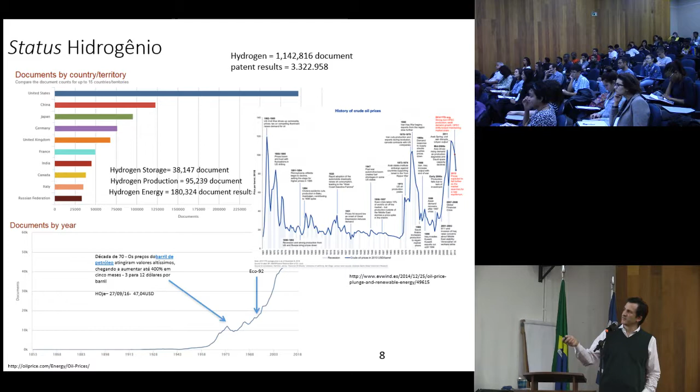So we start today with hydrogen production and storage for fuel cells. First, fuel processing may define the conversion of the waste primary fuel into different kinds of fuel supplied to the fuel cell system, specifically the fuel gas required by that stack. Important: each type of fuel cell stack has some particular fuel requirement.

For example, for phosphoric acid fuel cell, the hydrogen must be rich and contain less than 0.5% of carbon monoxide. Carbon monoxide is a poison for phosphoric acid fuel cell, as is the case for PEM fuel cell as well - it needs to be essentially carbon monoxide free. But molten carbonate fuel cell and solid oxide fuel cell are both capable of utilizing carbon monoxide through the gas shift reaction.

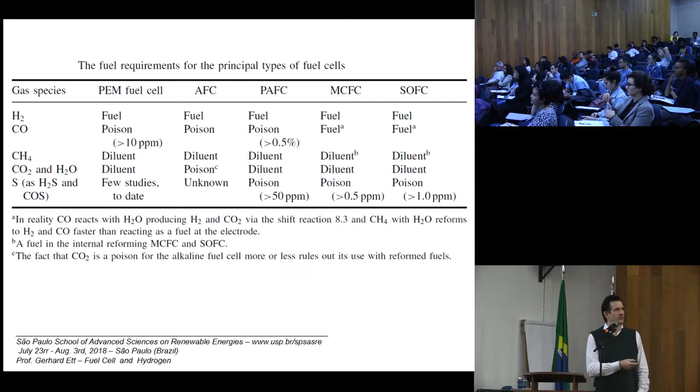Here we can see that about 500 billion cubic meters per year of hydrogen is produced in the world today. 4% comes from electrolysis, 18% from coal, 48% from natural gas, and only 30% from oil. This gives us an idea of hydrogen production in the world, but most hydrogen is produced for the petrochemical industry.

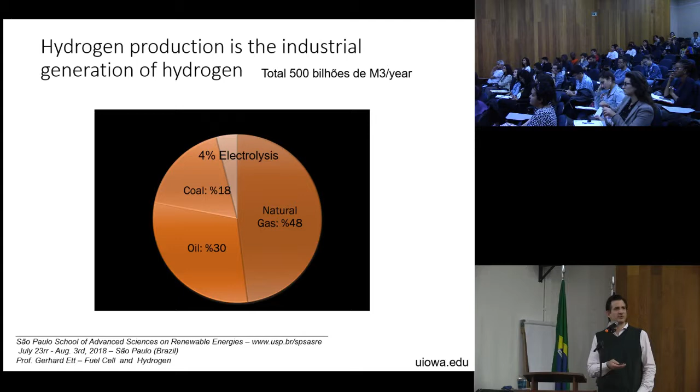So here you can see some technologies - look here, coal gasification with CO2 sequestration, using coal with very low CO2 emission. This is the reason they put this technology in the future: coal gasification, normal gasification here, coal gasification with CO2 sequestration here, electrolysis - this kind of technology is the future.

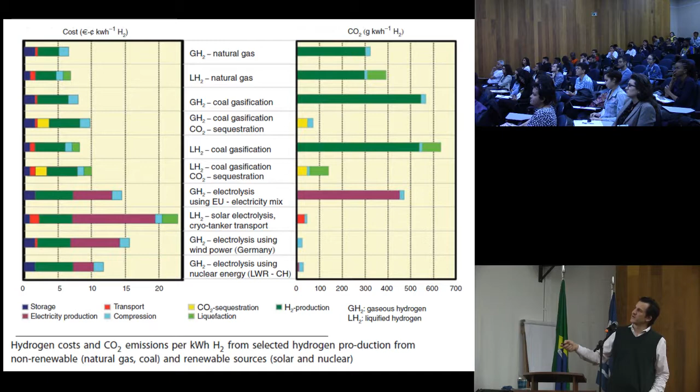Because you said, like for the coal, for the natural gas, and for the oil, you have no idea what kind of technology they use - like using oil, I will show you today. I have a picture from oil; the name is RASF. It's a subproduct from petrol, from oil, and they have an entrained flow gasifier.

In Brazil, we have 4 plants in Araucária, in Paraná, and they do the gasification of the RASF to produce urea and ammonia.

Good, I have the picture here, but not in this computer. So, hydrogen... well, no, one more question.

My name is Csaba from Hungary. What technology is used for CO2 sequestration? That's not very clear, it's like clean coal. It doesn't exist, clean hydrogen with coal. What technology do you use to capture the CO2?

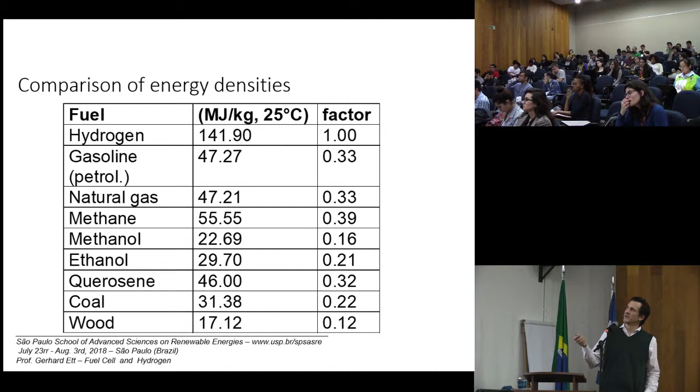Here we need a normal cubic meter, not pressurized. But we can still compare the data.

For hydrogen production, we can find different methods: gasification for forests, or biological processes that decompose forest material and produce methane, then hydrogen. Waste from sugarcane production for biogas, direct from sugarcane production, or from water electrolysis using hydro or solar-eolic power.

We have two big projects running today. One is from CESP to produce hydrogen, and another from a transmission energy project, also from oil, to produce hydrogen.

We have different kinds of fuel cell technology, but one I didn't mention is the reverse fuel cell. What's a reverse fuel cell? It's like electrolysis - a PEM electrolysis and a PEM fuel cell have the same materials, just changing a little in the electrode. One is titanium, another carbon black or graphite.

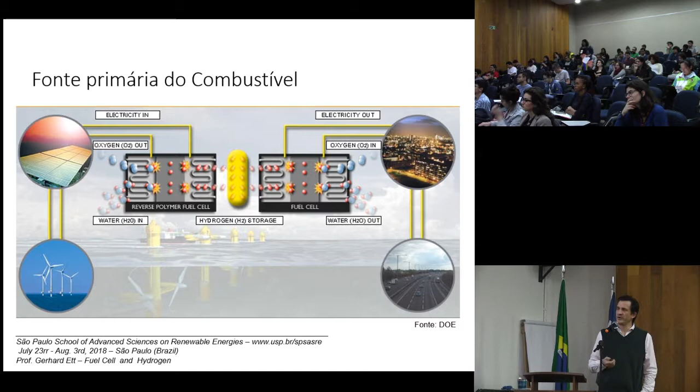But we have some primary fuels: natural gas that we can reform, methanol that can be reformed or used in direct methanol fuel cells, biogas from decomposition of garbage, gas reformation, and ammonia reformation.

Yesterday on the internet I tried to change my presentation for today. I found a company selling ammonia fuel cells online. A long time ago, 10 years back, I saw a company like this at a fuel cell congress. But now it's a very nice product, well designed.

Ethanol is strategic for Brazil, but not only for Brazil. For storage, we can use direct hydrogen tanks at 350 bars, but the European trend is toward 700 bars. Also metal hydride, carbon nanotube, liquid hydrogen - I will discuss more about this.

For hydrogen production, we have water electrolysis, and different kinds of it: conventional electrolysis, old electrolysis that used mercury, and advanced electrolysis with new electrodes and special membranes, like a PEM membrane, Nafion.

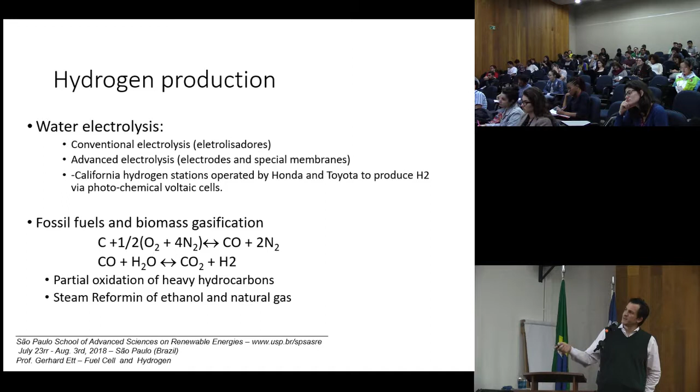We also have fossil fuel and biomass gasification - we saw this reaction earlier. Then we have partial oxidation of heavy hydrocarbons, which is what you asked about. And steam reforming of ethanol and natural gas.

Then there's thermal decomposition of water at high temperature, where water decomposes. We also have chemical water decomposition, using iron chloride with hydrogen, and byproducts from industrial waste - the very famous chloroalkali process. All the materials from the PEM fuel cell, the membrane, start here - used first in the chloroalkali process, then the technology changed to be used in the PEM fuel cell.

Is it possible to produce hydrogen with wastewater? Can you go back in the slides?

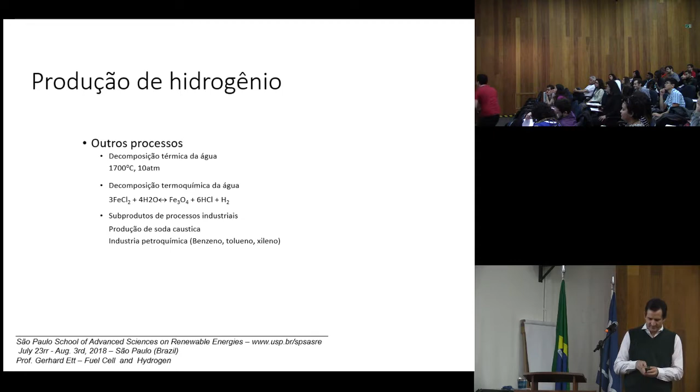Yeah, this thermal decomposition of water process. Is it possible to produce hydrogen using wastewater? Yeah, but you need very high temperature, unless you use a catalyst, which makes it much more efficient. It's possible, yeah. What happened on the nuclear reactor?

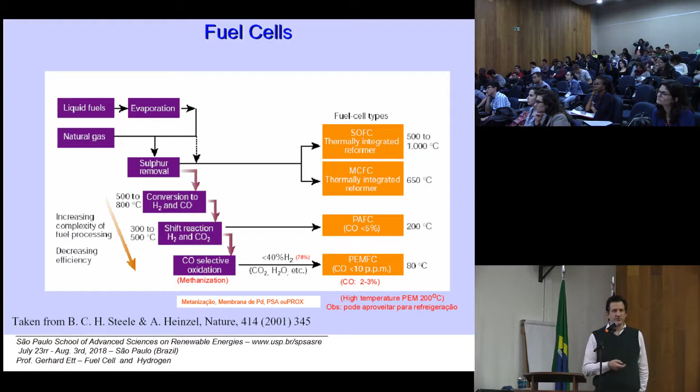But the normal PEM fuel cell is very intolerant, look here, less than 10 ppm of carbon monoxide. So they need a CO selective oxidation step, putting a little oxygen inside the hydrogen to oxidize the carbon monoxide to carbon dioxide, which causes no problem. When we use high temperature HT-PEM, it's possible to increase the tolerance of carbon monoxide up to 3%. This is fantastic.

So we start with the reforming process, using the gas we have here in the cylinder. This comes from steam reforming of ethanol or natural gas reforming, but this is an endothermic process.

This is a high yield of hydrogen process, steam methane reforming. They can produce hydrogen and carbon monoxide at a ratio of 3:1 or 5:1. For the Fischer-Tropsch process to produce gasoline, they normally use 2:1, but there are some variations of the process.

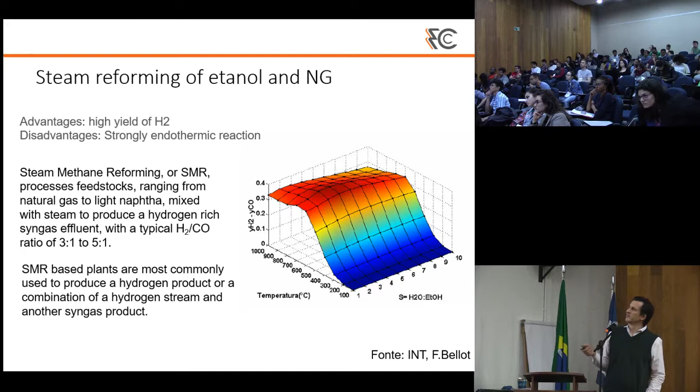If you use a different kind of catalyst, you can change the whole reaction. The catalyst is very important to direct which product you would like to have. Here we have INT from Brazil, which studies very strong catalysts. Also at the University of São Paulo, in the Polytechnic School, we have one of the best teams working on catalysts.

Steam methane reforming: here we can see the reactions. Methane reacts with water at high temperature to produce carbon monoxide and hydrogen. The carbon monoxide can then react with water vapor to produce CO2 plus hydrogen. All these reactions use nickel as catalyst.

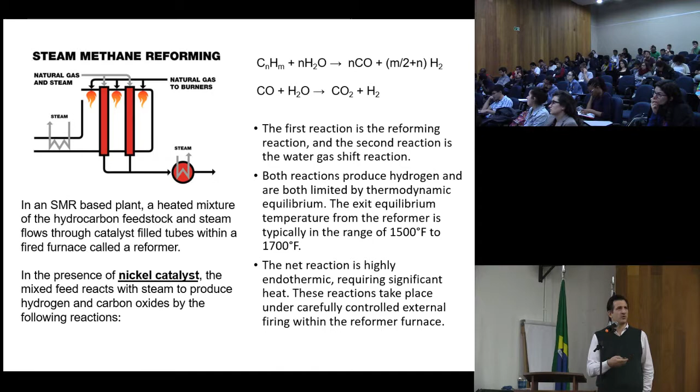They run this in a high temperature process, with an indirect flame outside the reformer to heat everything. This operates without oxygen, but it's possible to operate with oxygen too, though that's another type of process. In steam reforming, depending on the temperature of the process, you can change the product you will get.

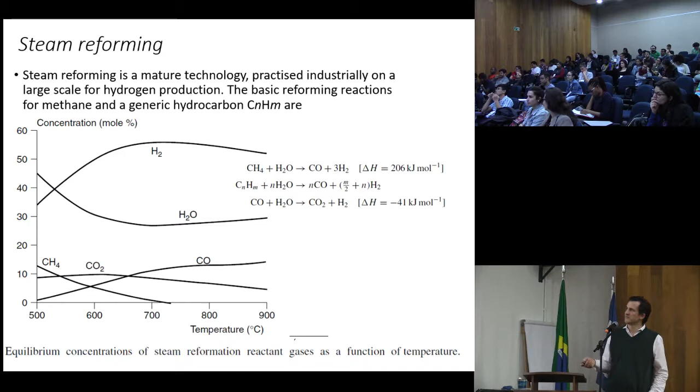Look here, the concentration of hydrogen increases when you increase the temperature. And here, let me go back.

One big problem with all the catalysts that run at high temperature, the same for the molten carbonate fuel cell and SOFC fuel cell, is the risk that carbon can form inside the fuel cell system, inside the reformer catalyst. This can occur in several areas of the system where hot fuel gas is present. But it's possible to control this if you put a little water inside. I will show some pictures about it.

A simple way to reduce the risk of carbon formation is to add steam to the fuel stream. The principal effect of this is to promote the shift reaction, which reduces the partial pressure of the carbon monoxide. This steam also leads to the carbon gasification reaction, which is really very fast.

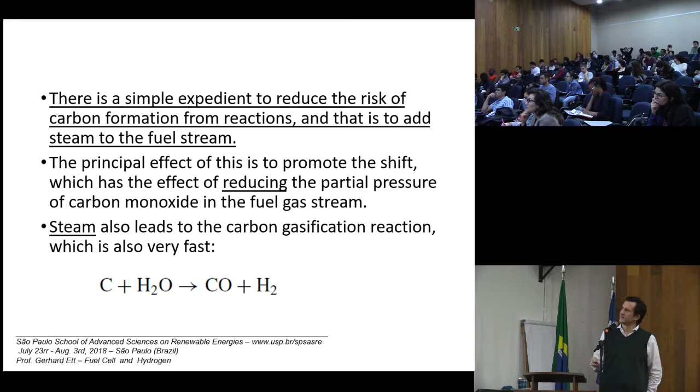Here's a project from Siemens, a solid oxide fuel cell. We can see here the desulfurization, the catalytic adiabatic pre-reformer, and the high temperature fuel cell. Then we have the autothermal reformer.

We note here that we put a little oxygen inside the reformer, and here it's minus 50. It's like a steam reformer, but when we put oxygen inside, we can heat the reformer more easily. And the ratio of the syngas proportion also changes: it was 3:1, now it's 2:1.

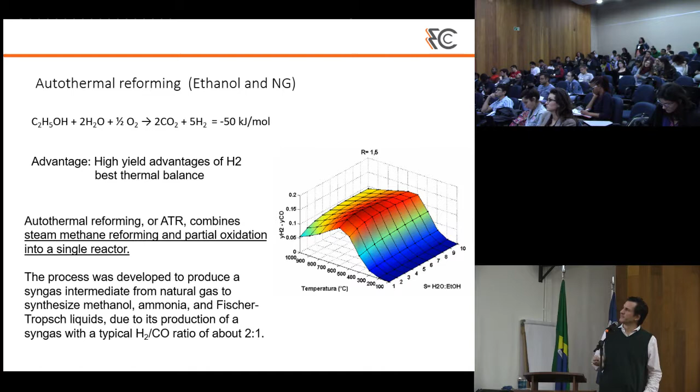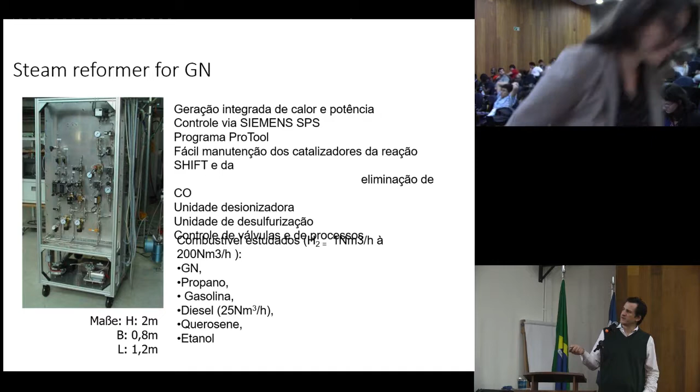Here we can see the design of a reformer. Here you have the burner. Here we have the vaporization of the fuel. Here you have the reformer zone. Then heat exchange. Then here you have the shift reaction. It's a lower temperature. Again, heat exchanger.

And here the last part, to remove all other contaminants, CO removal. And here we can also use pressure swing adsorption, PROX, preferential oxidation, and also palladium membrane. It's very useful in some new small reformers. So here is a diagram from our German reformer.

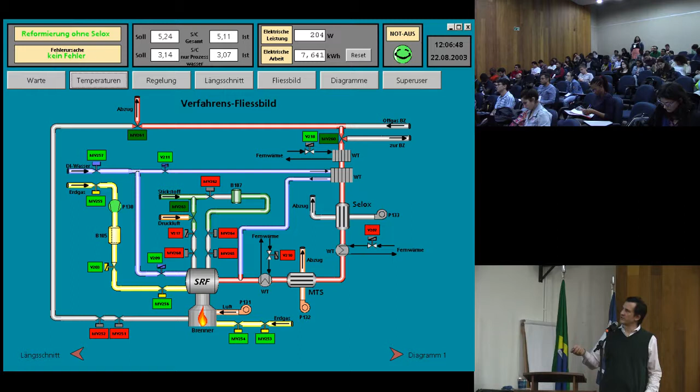Then here you can see the reformer and all the process that they have to control the process. I will show more details of the project. Here you can see this part here, the temperature of the reformer. Here the temperature inside the reformer, outside the reformer. Here the power of the stack.

They change the power, the electronic load. And here we saw the answer that the temperature from the cell increases, then decreases, then increases and decreases. And the temperature of the reformer stays stable. This is very important, that this reformer works with the fuel cell. Here then we start, interrupt the fuel cell, and the reformer stays stable. Nice result here.

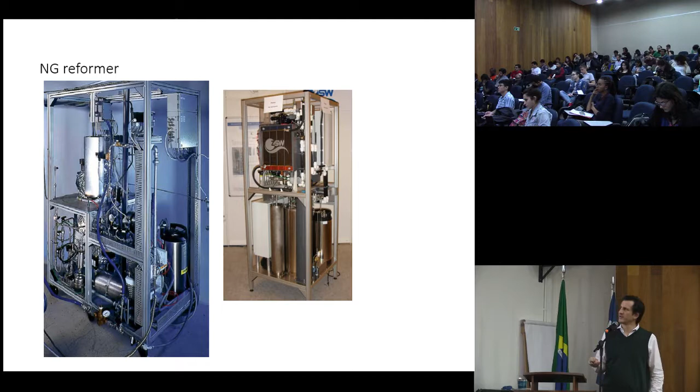Different kinds of natural gas reformer. Here is a reformer with a fuel cell, all in one piece. Here is an LPG reformer. Then here now is an autothermal reformer with a methanization of CO. They transform CO into methane.

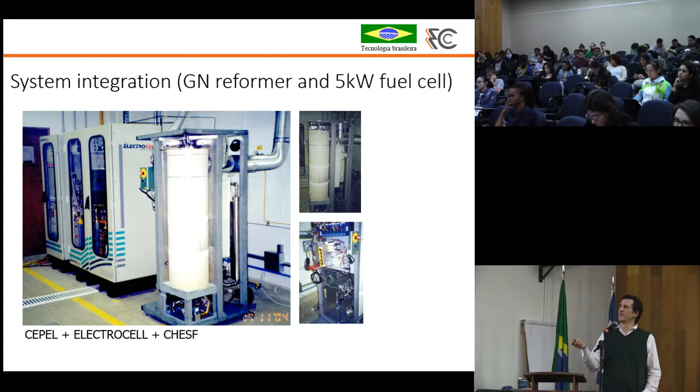Here a project that we participate in with CEPEL and CHESF. This is a natural gas reformer, and we put the reformer, we feed with hydrogen the 5 kilowatt fuel cell. More detail of the project and reformer. Here we need to desulfurize because this is in Rio de Janeiro. In Rio de Janeiro, near the Mangue, on the sea, we have a lot of sulfur. If you put one piece of copper there, in 1 week it transforms into copper oxide, black copper oxide.

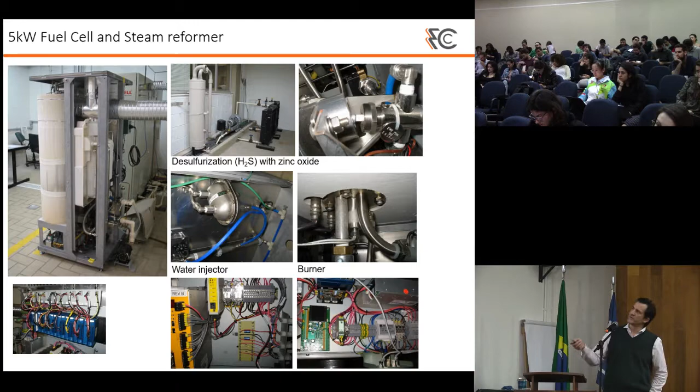Here you can see the burner with 2 sensors, and here the water injection for the gas shift reaction, and here all the electronic power control. Here's the reformer. This is the gas shift reactor. The other reformer is the autothermal reformer. What you saw, all this technology here, we use the same technology in the gasification process.

And here the autothermal reformer, we use methane, react with oxygen, we will produce carbon monoxide and hydrogen. And what we note, I'll show more in the next slide. Here, the water gas shift reactor and preferential oxidation. Here we see the reformer, the water gas shift reaction, the PROX that we remove the CO to produce only hydrogen. Then this hydrogen goes direct here.

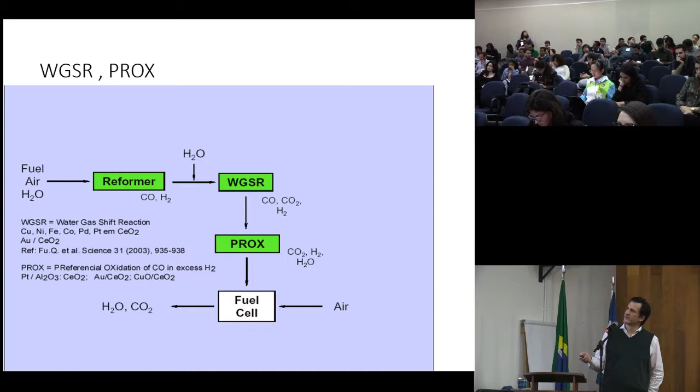Here, I had this picture for about 15 years. But what had changed? Here it was, they will install 200 units. Yesterday it changed. 2,000 units were installed in 15 years. It's amazing. Congratulations to Japan. And here we can see, okay, we'll go back.

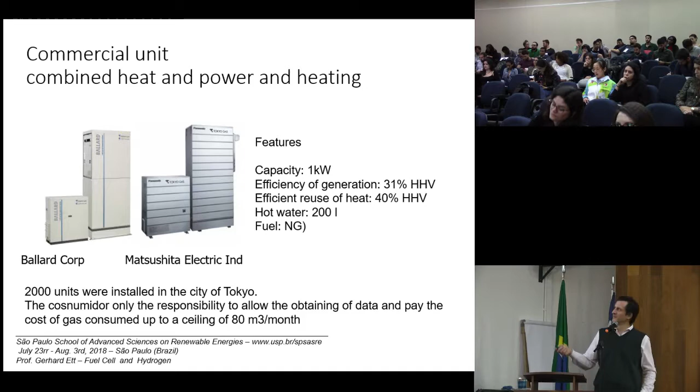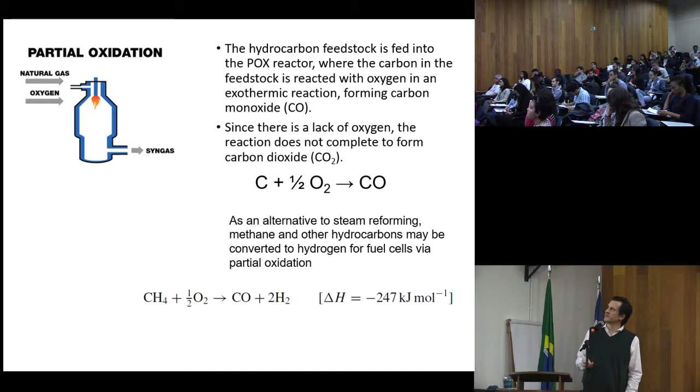The proportion of hydrogen is little, 1.6 to 0.8, but the quality of the gas is much better. And the enthalpy is minus 247. And here we can see the oxidation of carbon forming carbon monoxide. Some designs of the reformer: we have very different kinds of design, and every company has their own patent in design, different designs.

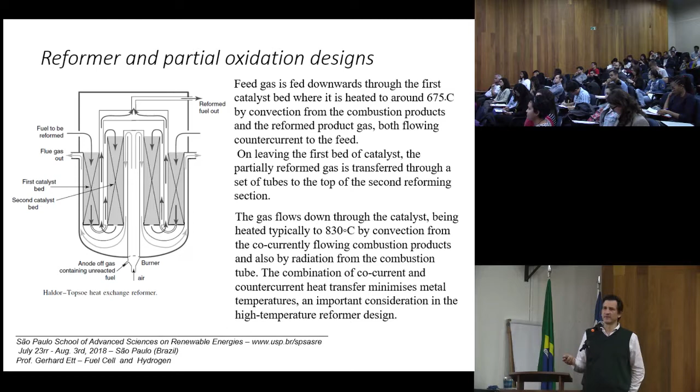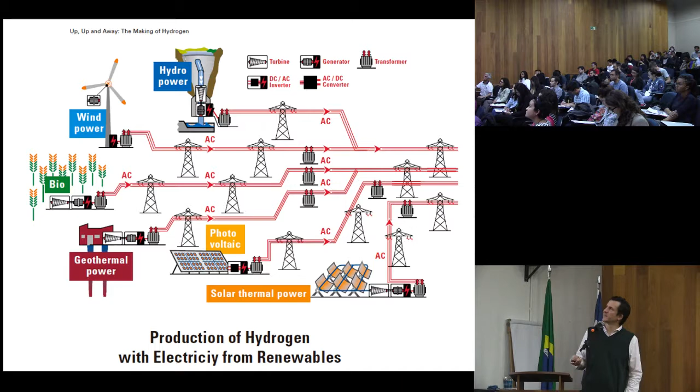But to purify, we mentioned that for PEM fuel cells we need to purify. Then we need selective oxidation, methanation, or a palladium membrane. On the reformer that we worked on, they have the palladium-platinum membrane.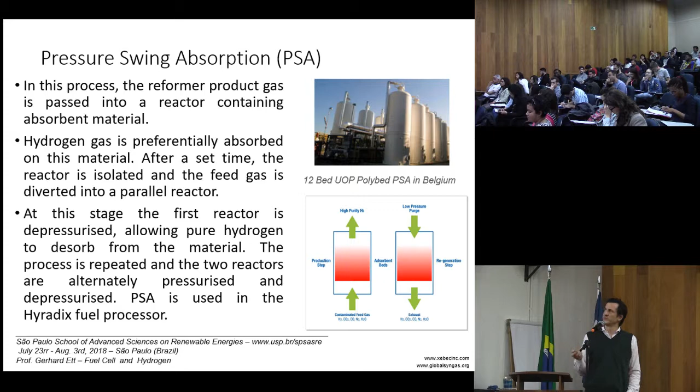When you have high pressure, you adsorb, you close the valve and go to the other vessel, pressurize the other vessel, then you open the valve, desorb the first vessel. You are changing, opening, closing valves to make it happen. You have different adsorption materials, different processes. It is one kind of process.

The desulfurization is also very important. Natural gas and petroleum liquids contain organic sulfur, and it is a poison for the PEM fuel cell and high temperature fuel cells too. They also have, as I mentioned, the membrane reactor, a selective membrane with palladium, and then they filter the hydrogen and separate the CO2.

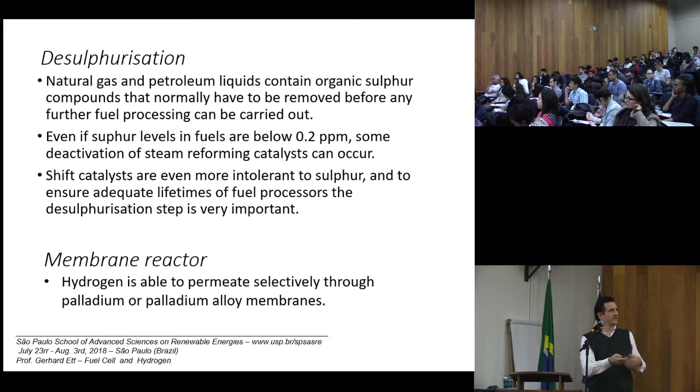This is a new project. I have a student who studied this. It is a high efficiency solar thermochemical reactor. They have two steps, one of oxidation and another where you react with hydrogen. Then you oxidize the oxide here and produce hydrogen.

This is a very nice project, and according to the DOE, the Department of Energy, it is one of the futures of hydrogen production. They have the chance to have a lower price. They use the sun for energy for all these reactions.

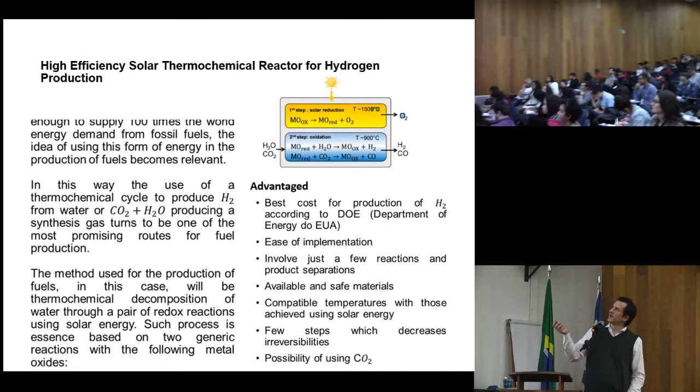I will talk very little about pyrolysis, because from pyrolysis you can produce hydrogen, and Suani, next week, will talk about pyrolysis. But what's different about combustion, gasification, and pyrolysis? One is combustion with excess air. Gasification, less air, substoichiometric air. In pyrolysis, no air. You heat from an outside compartment.

From here you will produce bio-oil and gas, pyrolytic gas, and hydrogen. Here you produce the higher quality hydrogen. In some pyrolysis you heat without oxygen; they could also have a little oxygen. Then we will have fuel. We will produce tars, hydrogen, methane, and char. Some pyrolysis processes use the char to heat the pyrolysis process.

Here is the oil. If we compare this bio-oil with petrol, it's quite similar. The calorific value of petrol is higher, but it's very similar to petrol.

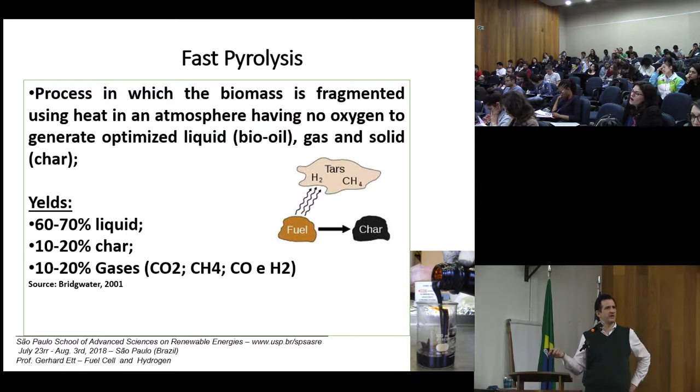So gasification is where we produce the most hydrogen in the world. It's a partial oxidation process where carbon, such as coal, natural gas, or biomass, is broken down into carbon monoxide, hydrogen, carbon dioxide, and methane.

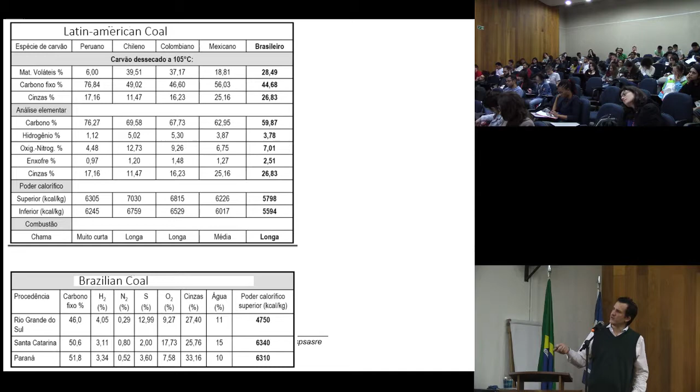Here we can see using biomass. In the biomass composition, we can see we have hydrogen and we have carbon. With carbon you can produce hydrogen using a water gas shift reactor. Here you can see the hydrogen. It is all here; the other here is a problem.

And here is another unit, but here we see 17 megajoules per kilo. It is very good data, but if you compare with kilocalories, the enthalpy is a little lower than coal. Coal is much better. But it's nice data here.

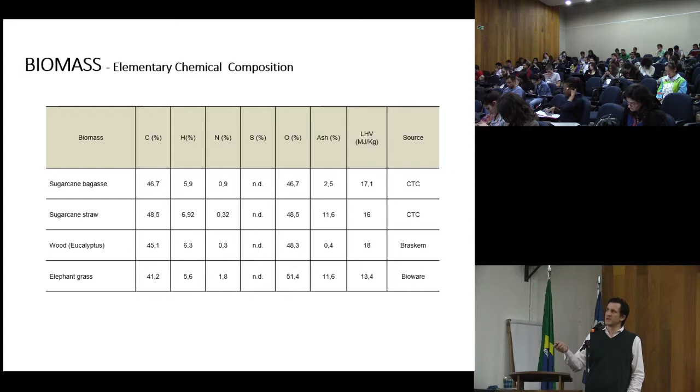Here we can have different kinds of gasifiers: fluidized bed, entrained flow, fixed bed, but 77% of gasifiers are fixed bed, 20% fluidized bed. Here we can see the application for different kinds of technology. The feedstock must be different.

In entrained flow, which has the biggest mass production of hydrogen, you need to have fine particles or liquid form. The residues they use in this process, from oil, are used in liquid form. It's a solid; then they heat it, it turns liquid, then they inject it inside the reactor.

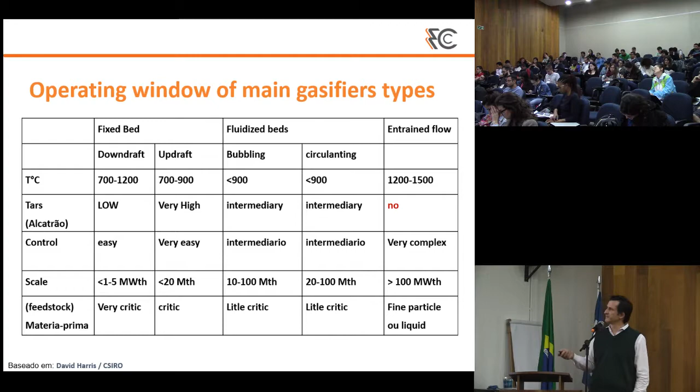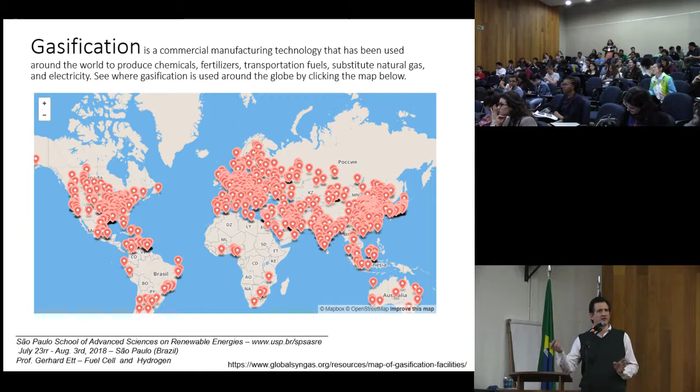Here is very new data I took yesterday: all the gasification plants in the world. And here we can see the data. Here, look here. Brazil, we have a very big gasification plant. All reformer. This here is more of a reformer plant. And this here, in the middle, is from Araucaria. If you go to this site, it will show you all the data from the plant. It's a very nice plant.

In China, very big places, very big gasifiers. Here also, we had a lot of projects, 2,800 gasifiers, and this technology grows very fast. It's amazing.

Here is the syngas production for different kinds of products. Look here. Hydrogen for refinery, hydrogen. Then we see we have a lot of hydrogen. Hydrogen is not the problem. The problem is the distribution of the hydrogen to our houses, to the companies, but not to the refinery. This is the problem for the hydrogen economy. But we have hydrogen. We have the technology.

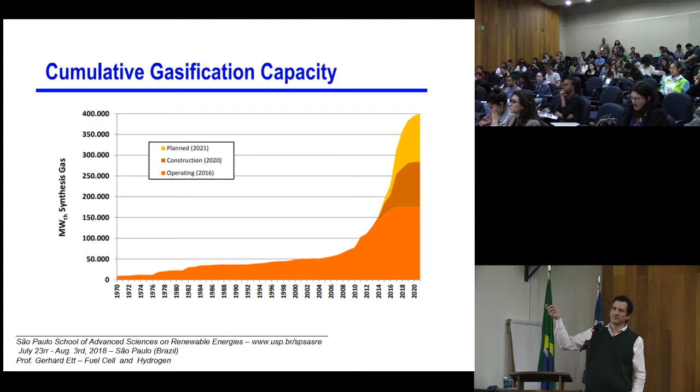Look here, what happened. 2008, 2010, look here. Amazing. Production of hydrogen. Here.

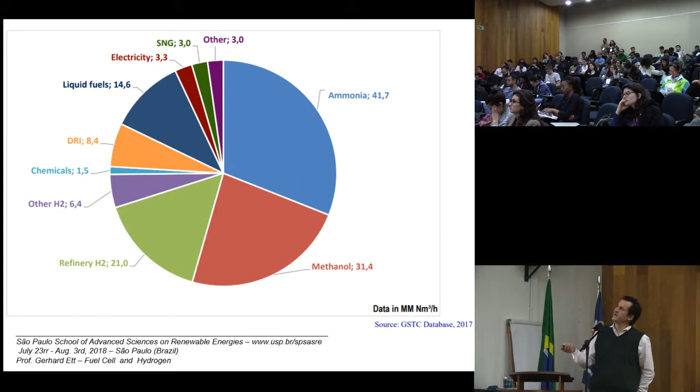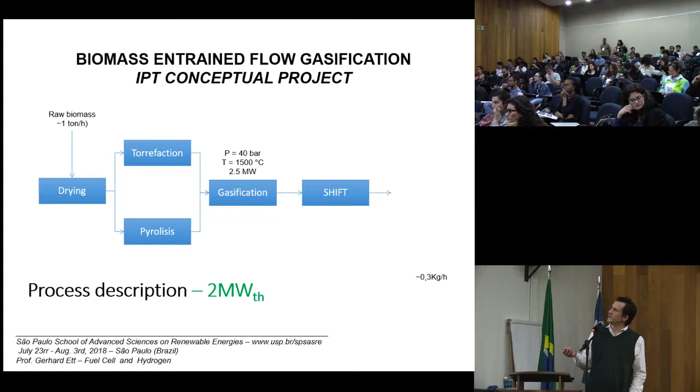Sorry. This is a project that I participated in at IPT. It is to produce hydrogen from biomass, bagasse from sugarcane. The project was 1 ton, and we produce 0.3 kilos per hour of hydrogen. And the other byproduct is CO2.

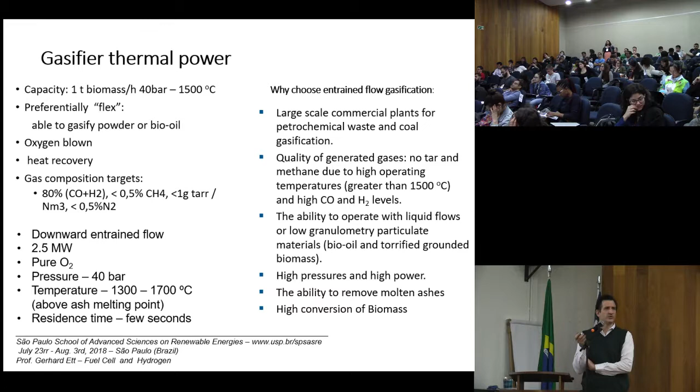This is the detail of the project. You can see here, in this plant we produce 260 kilograms of syngas. And it starts with two processes: controlled torrefaction and pyrolysis. This is a different kind of thermal gasification. And here we can see the 1 ton biomass, 40 bars. And we will explain why we use 40 bars.

This is the reason. Why do we use 40 bars, high pressure, in the gasification process? Because if you use low pressure, for the Fischer-Tropsch process you need pressure. Then if you need to pressurize with gas pumping and syngas compression, you will lose energy. The total energy that you will lose is 22 megawatts. But if you do gasification at 50 bars, you consume only 5 megawatts. So sometimes it's better to increase the pressure of your plant.

This is the reason that in electrolysis they also try to have hydrogen production at higher pressure. Because when you need to compress the hydrogen into the tank, into the cylinder, you lose energy. And that is the reason that today we have electrolyzers with 60 bars pressure.

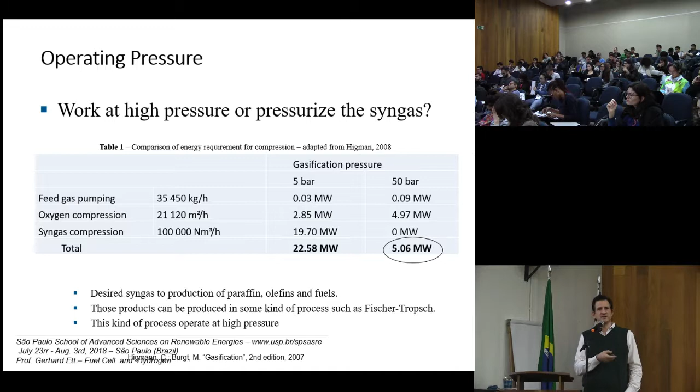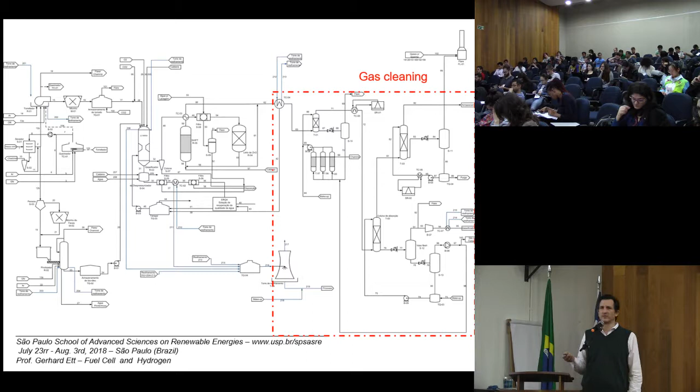You can see gasification, shift reaction, clean gas. Look here. 50% of the plant is the clean gas process. 50% of the capex is clean gas. This is the reason that clean gas is not good for the plant. It's very expensive. But if you use, for example, this gas with a high temperature fuel cell that can operate with some impurities, you reduce the cost of the gas cleaning. So the gas cleaning depends on where you use your hydrogen.

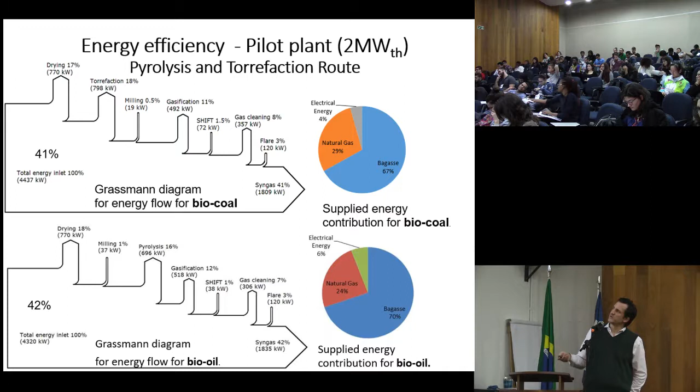Here we compare different kinds of gasification processes. And here, the energy efficiency, where we lose energy. The small plant is 41% efficient. Here the torrefaction loses 18% efficiency. Here the pyrolysis 16%, gasification 12%, shift reaction only 1%, gas cleaning 7%. When we start with a bigger plant, 648 megawatts, the efficiency increases, but all these data stay the same.

One very nice thing in this project: in an optimistic plant, the return on investment is 286%. A very high number. I always think that before we start to construct, we need to calculate the price, have an estimate of the price.

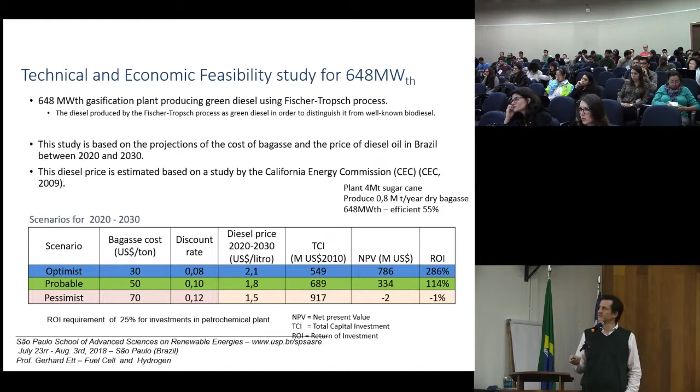So, what can we do with syngas? A lot of things. With syngas, you can use Fischer-Tropsch, produce gasoline, naphtha, diesel, methanol, DME, dimethyl ether, acetic acid, methyl acetate, or hydrogen for fuel cells and refineries, or also syngas for fuel cells, combustion motors, gas turbines. You can use syngas in many applications.

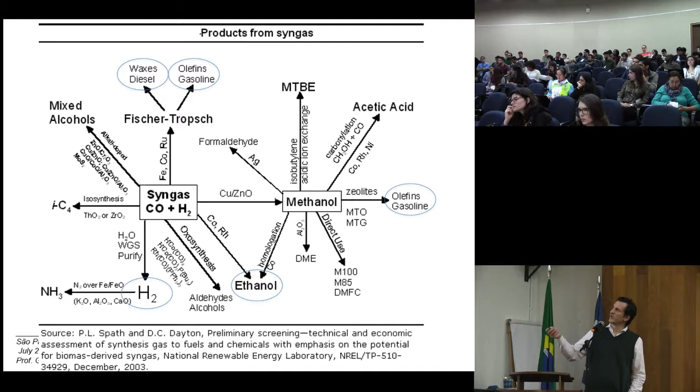But for syngas, you need catalysts, special catalysts. So we have a special industry that studies only the catalysts that we use in syngas production or in the methanol route.

So we start with the electrolyzer. It's a very nice product. We can have a very clean gas, but they consume a lot of energy to produce energy for a fuel cell. You need about 5 kilowatts, 5.3 kilowatts or 4 kilowatts, to produce 1 kilowatt in the fuel cell.

But this is not good. Also, this is good, depending on the price that you have on the energy. For Itaipu, it's the most beautiful scenario. They don't pay for the energy. They have a low price for the energy. And then the energy that you produce with the fuel cell is very low. But they can store energy.

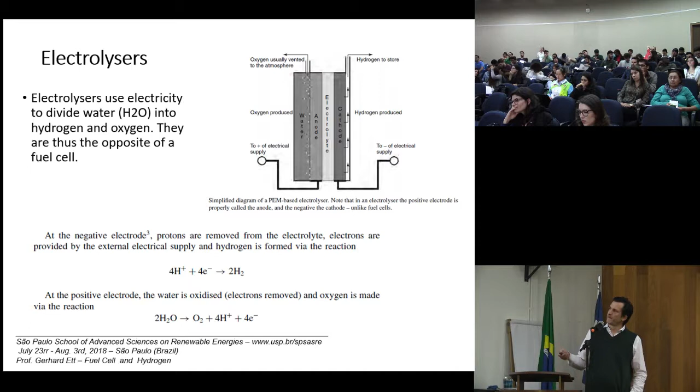With hydrogen, you can store, you can pipe the hydrogen. The pipe from Itaipu to São Paulo is a very big hydrogen storage tank. And then here we can use the electrolyzer. We divide the water into hydrogen and oxygen in two compartments, the anode and cathode, and we have the oxidation of the hydrogen and reduction of the oxygen. The same that you have on the fuel cell.

The advantage of the electrolyzers: the product hydrogen is very pure. It doesn't need to be stored. It's much easier and safer to supply than a bottle of hydrogen, like here, my gas cylinder. I just plug it into the voltage, and I can produce hydrogen at this moment for my fuel cell. The other way, I would transport the cylinder. At this time, a hydrogen electrolyzer would be easier.

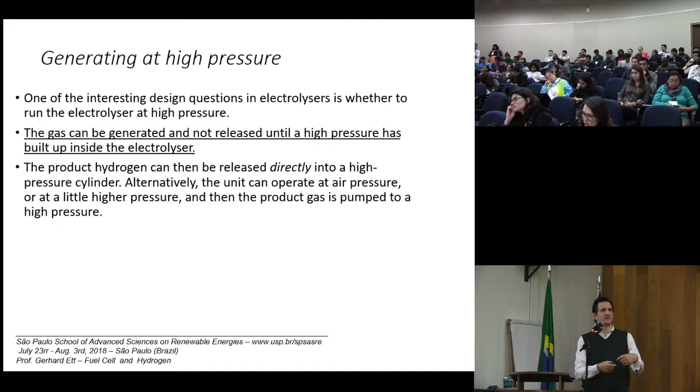And you have the PEM electrolyzer. It's very similar to a fuel cell. You have the anode, you have the cathode. Here we have a different kind of construction, but look, it's a PEM fuel cell. It's the same PEM fuel cell, but it's a different material. The electrodes are different because if you use carbon here at high voltage, we will oxidize the carbon. Then you need to have different materials.

They use titanium. And titanium you can use with iridium oxide or with, I forget the name. Okay, titanium and iridium on one side. Here we can see the catalyst that they use. In some high-tech electrolyzers, they also use platinum, also Vulcan, which is carbon black. The name is ruthenium oxide: iridium and ruthenium oxide as coating. Because if the titanium oxidizes, it will produce a little coating, and you have an electric contact problem. If you use ruthenium oxide or iridium oxide, the electric resistance will be very low.

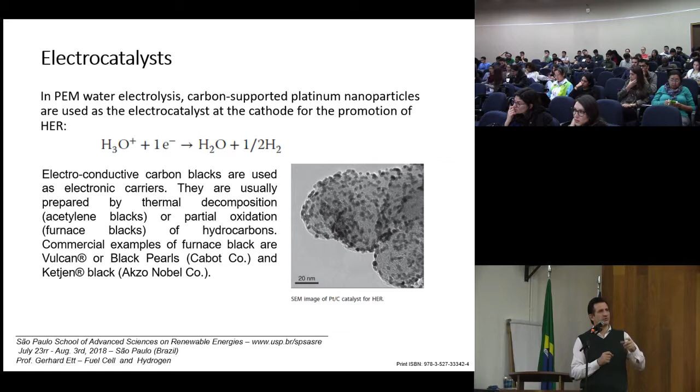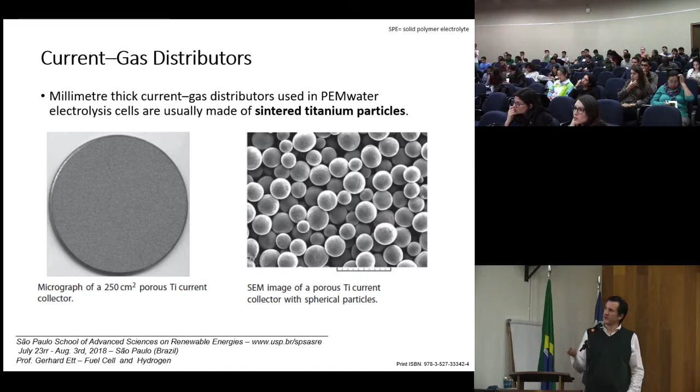Here you can see the titanium current collector, and here are some microscope pictures of the spherical particles of this kind of current collector material. It's a sintered titanium particle here. This we can also study here at the University of São Paulo.

Here is a very, very high-tech electrolyzer, a very new electrolyzer, no more than 5 years old. You produce 60 bars with a PEM electrolyzer. 60 bars. The normal electrolyzer will produce 7 bars. The maximum, the best electrolyzer, 15 bars. This is a 60 bar PEM.

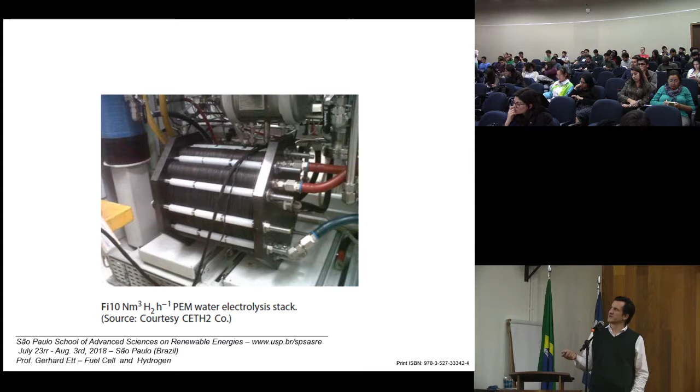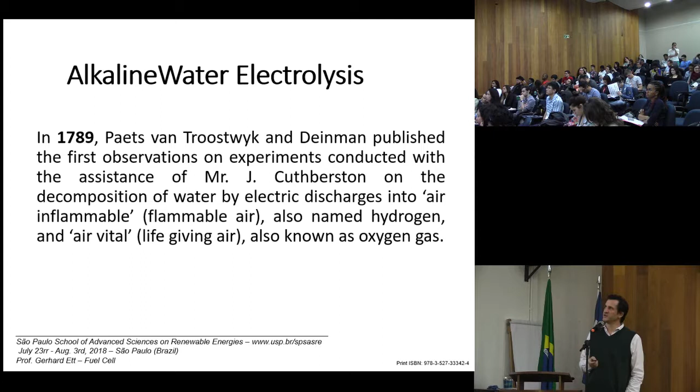But alkaline water electrolysis, when did it start? Oh, very old technology. Very old technology, but it runs every day. This is also a new technology. They evolved this technology. It's no longer the same technology as 100 years ago. And here, what happens is they use KOH, and the ions in the system are OH minus.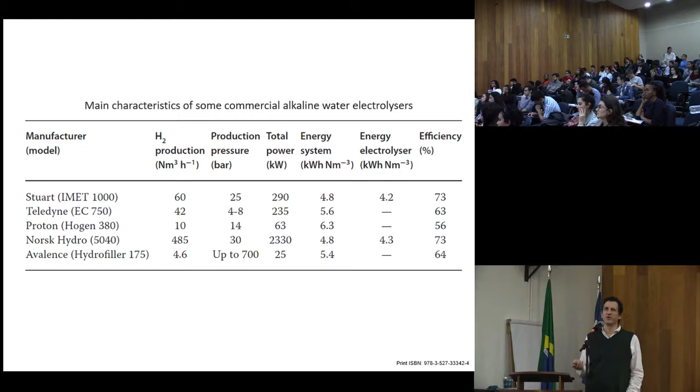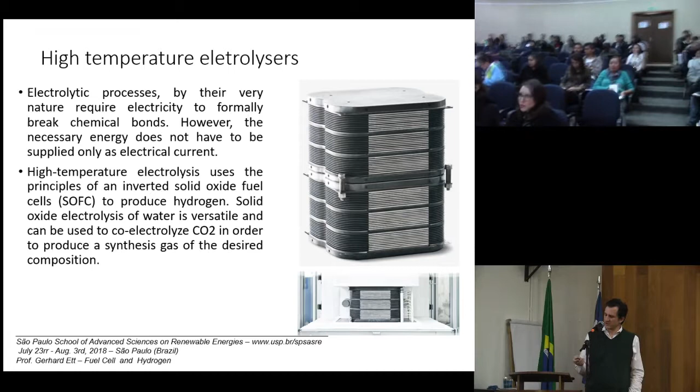Then they produce hydrogen. This is an SOFC, high temperature, and they can produce hydrogen from this process. And this company also works with fuel processing, and they can also produce using syngas applications.

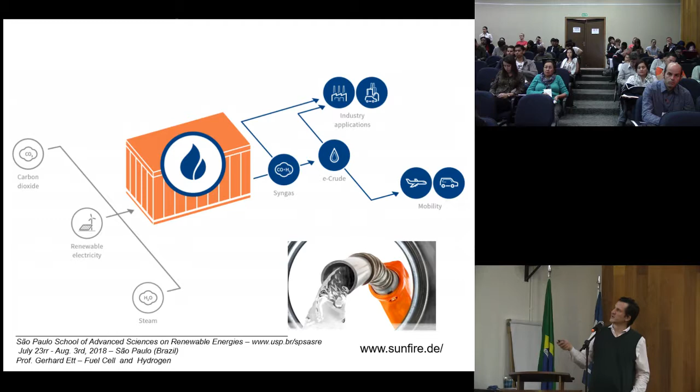Detail of the process: steam, renewable electricity, the carbon, they will produce a syngas. It's also a chemical reactor. Another point, this is from Frano Barbir.

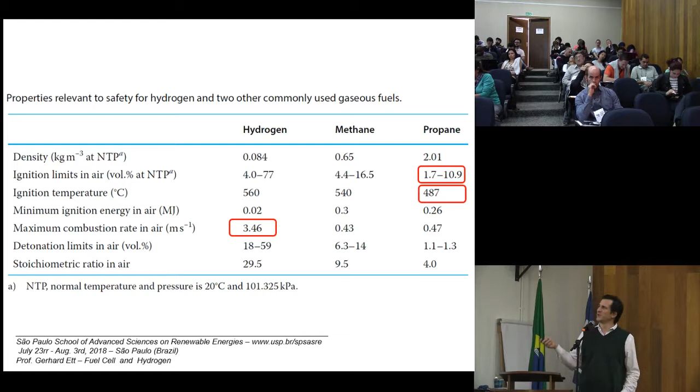Here we can compare propane and hydrogen. We saw that propane has a lower ignition limit, 1.7. Hydrogen has 4. But propane with a little more can ignite, but hydrogen 77%. All are gases, dangerous gases. We need to take care. The same protection we have with hydrogen, we need to have with propane. All are fuel.

Here's a car test from DOE with oil and with hydrogen. Here we have a valve; they open the valve and start burning the hydrogen. And the color is colorless, a little blue.

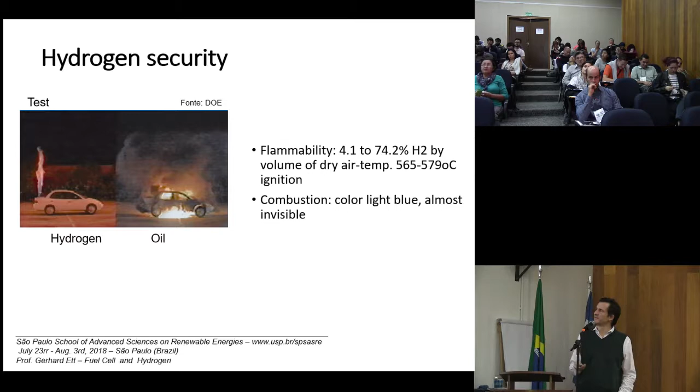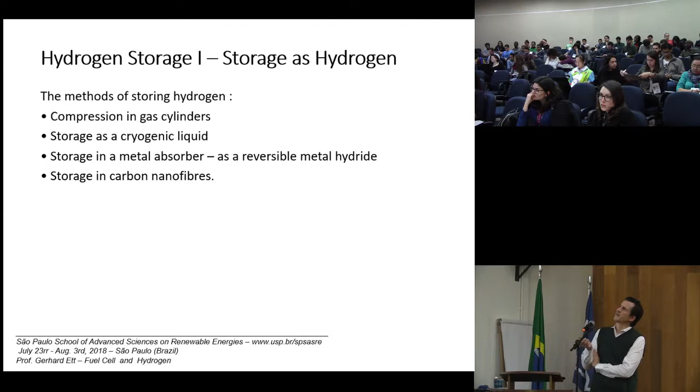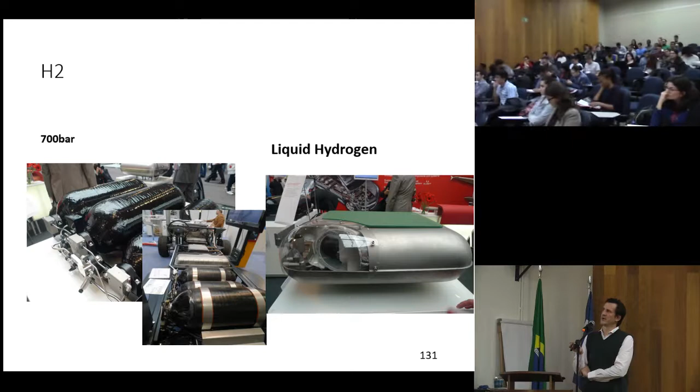Here you can see the liquid hydrogen tank from GM, and here the aluminum with carbon fiber for 700 bars. Here we can compare the steel cylinder 200 bars and the carbon with aramid fiber epoxy aluminum tank. And here we can see the mass of hydrogen stored here and here. So we have much more hydrogen in this cylinder than in this cylinder. Then we note that with this kind of technology, you can have much more hydrogen inside.

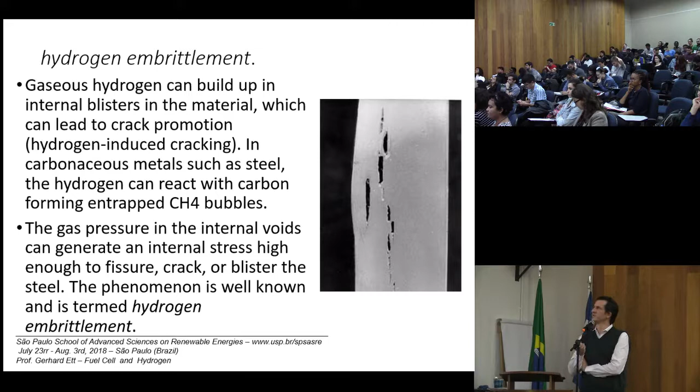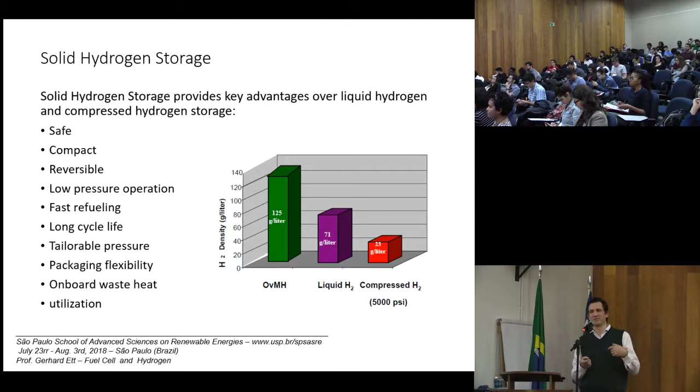Some problem with hydrogen: we need special materials. In the hydrogen environment, they could crack if you don't use special materials for hydrogen. If I use hydride, you can store much more in hydride than in liquid hydrogen. This is one place to show the future, what could happen. But today I will show you something new. Yesterday I was studying a new application. I will show you later.

This is an Ovonic tank from metal hydride. The different kinds of materials. I will send the presentation to you. You have time to read. And every time you have where I received this data.

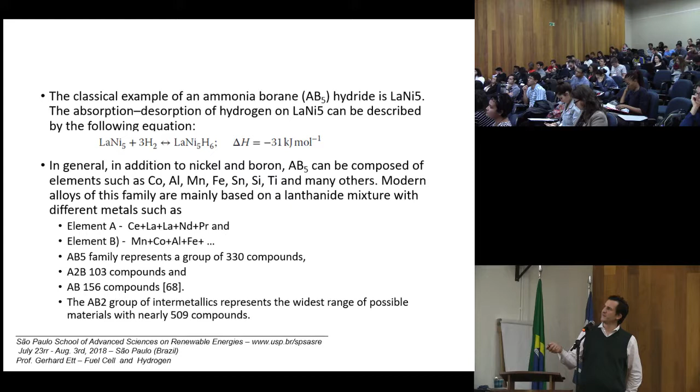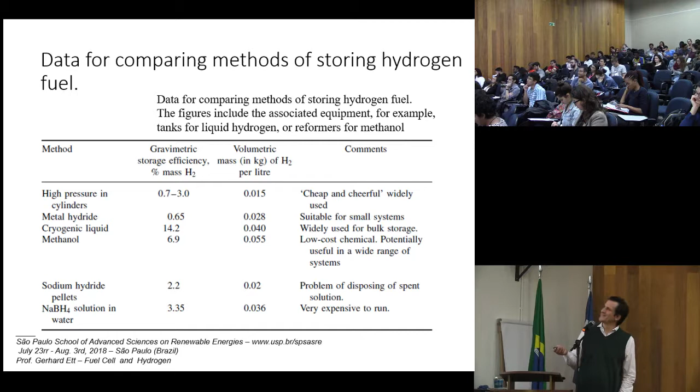This reaction of lanthanum nickel, AB5. Different types of materials you can use. Here's the AB5. Different kinds of materials that you can use to store energy. Again, you can see the volume of hydrogen. I have 2 minutes, I run a little. Again, we compare different kinds: hydrogen, methanol, ammonia to show you.